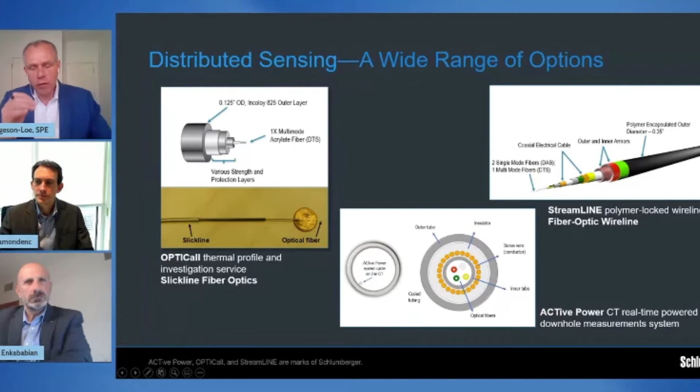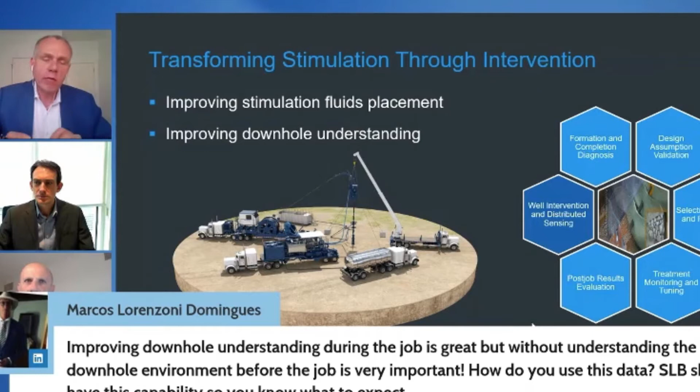Thanks, Pierre. So you talked there about the technologies, and in particular how fiber optics have been a big step change in this technology revolution in helping us improve effectiveness of the operations. So I'm just going to pick up a question from Marcos Domingues from the audience. Improving downhole understanding during the job is great, but understanding the downhole environment before the job is very important. So question to the pair of you is, how do you put all this new technology in use for a better understanding of downhole conditions?

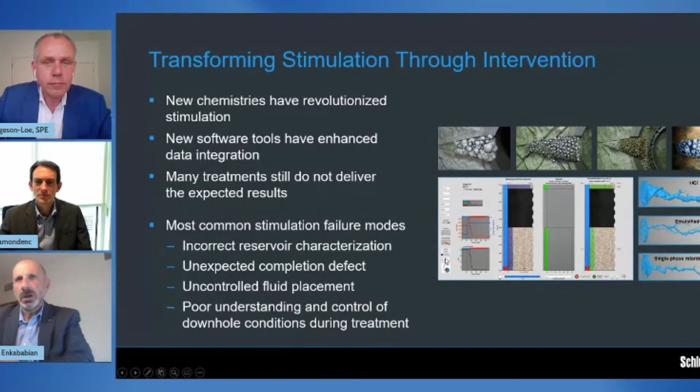So, excellent. Philippe, I let you take a stab at it, and then I will pitch in. Well, I think that ties to the section on formation and completion diagnosis. If you go to that section, and maybe we can go to that one. Yeah. So clearly that's an extremely good point. Understanding what's happening during the operation is important, but understanding what's happening before the operation is also very important.

Why? Because what we're going to see before the operation is going to potentially help us redesign the operation and prevent some of the failures that would have resulted had we not understood the environment before the treatment. And then I'll just mention a few examples, and Pierre will add to my point and show you how that technology is utilized.

But things like an unexpected thief zone is something that we have found more often than we expected when we started to do some actual measurements of injectivity using mostly temperature data. And as we know, a thief zone can have a drastic effect on the stimulation itself, because it will take most of the fluid. The tighter formation will not be stimulated, so you may get some good result when you open the well, but then it's going to collapse rapidly in terms of productivity.

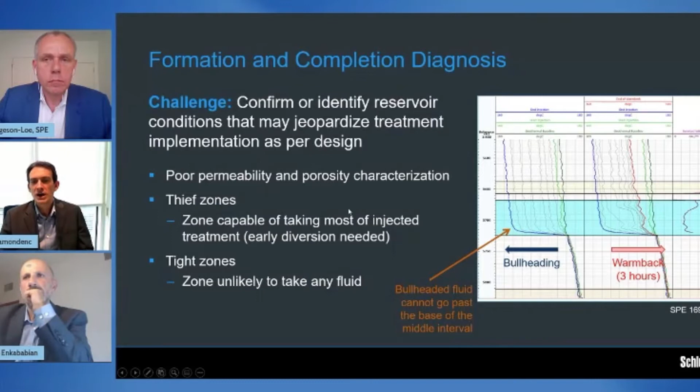We obviously have an analysis of different zones, but we could look at, for instance, the presence of faults and the presence of natural fractures. Philippe can be a good witness of this. In the stimulation world, you are always afraid of undetected big things, and natural fractures, which tend to be difficult to detect and characterize, are one of the big unknowns that you would have during a design phase, and after that for the execution of a treatment.

Now, having all the different tools totally agnostic of which conveyance means you're using allows you to have that characterization that is going to make the difference between performing an operation that may be okay in terms of the delivery and one that is really going to make a difference.

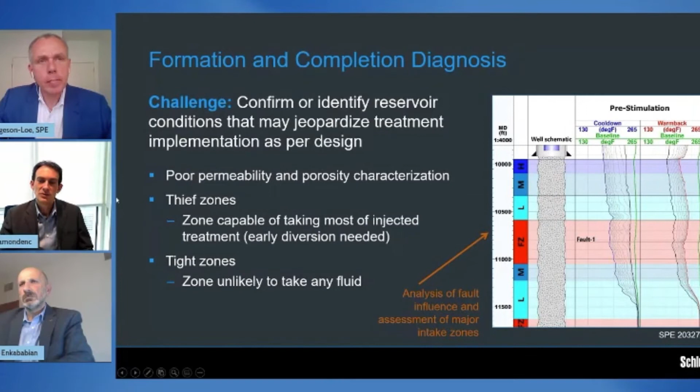And because we're talking about conditions that have a high degree of uncertainty, especially in the design phase, look at, for instance, the completion that Philippe was talking about. One of the aspects of the completion, whether this is the presence of maybe a casing leak, maybe a failure of one part of the completion, sleeves that wouldn't be holding, or in this particular case on the screen, swell packers that wouldn't be holding and segregating between the different zones. Those are the type of things that today we can analyze, and they are going to make or break an operation if we're capable of detecting them.

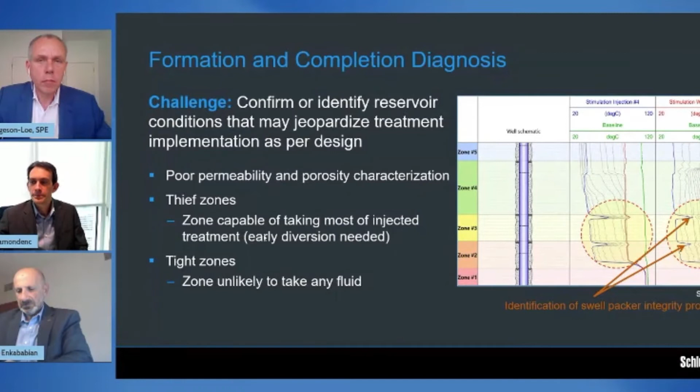Thanks, Pierre. So we're picking up some great comments from the audience here. The pair of you have been talking now about the importance of data. So let me just bring in two questions from the audience. First of all, Ahmed Tunublu: how do you design and execute the jobs if some or most of the reservoir data is missing?

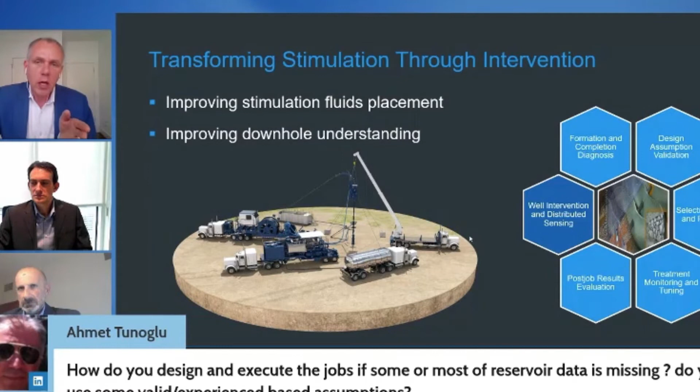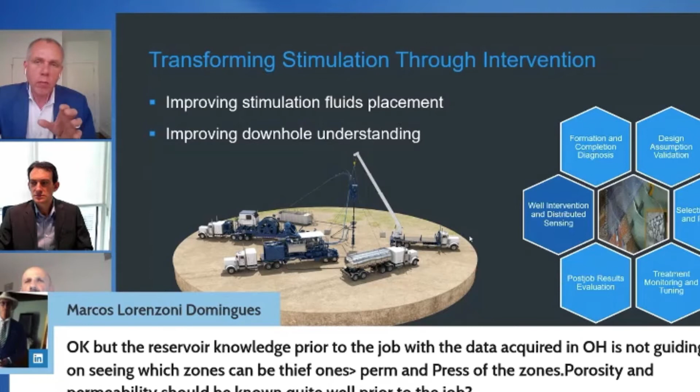And another aspect of data, Marcos Domingues, thank you again. He's asking, a lot of the reservoir knowledge prior to the job is acquired in open hole. So how does that maybe conflict with what you're going to be doing in the stimulation operation itself? So the question here is, how does access to data enhance operational efficiency and help you improve the stimulation outcome? And when it's missing, what do you do? Okay. All right.

So I like these two questions because in one case we don't have the data, in the other we have the data, and to go back to this formation diagnosis, if you don't have the data, the ability to go downhole, do an injection test, look at the injection profile, and derive the injectivity per zone allows you to create a data set that you can use to see if your design is adapted to that data set.

If you find out a very homogeneous reservoir, then a certain level of diversion will be needed. If you have a thief zone, you can go more aggressive. Now, if you have the data and out of that data, you derive a permeability profile and you know which are the zones that are going to take more fluid than others, and you design your treatment, you still want to go down there, do an injectivity test, and confirm that your assumptions are correct.

Because if they are correct, I mean, you've wasted half an hour and a little bit of water. If they are incorrect, then you really want to step back and look at your design. So in both cases, the ability to test before you do the job is important, and it's also important to validate your design assumption, which you derive from the data you have. And I'll just take two examples, and then I'll let Pierre continue on that.

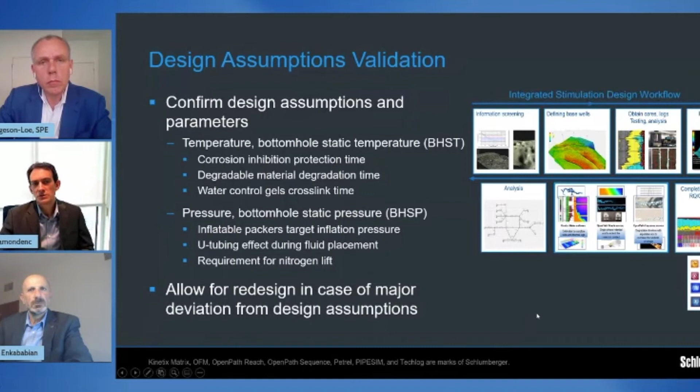So it's not only from the standpoint of getting the information right before performing the job because you have the equipment or during the operation, but over time you have that historian being built up and that information through interventions that sometimes have nothing to do with stimulation, but are going to give you that edge to perform better on the stimulation.

Now, just to give a few examples, this is one of those cases where a field was requiring some abandonment and trying to have a rejuvenation. The big question was, okay, but how do I do that at the level of a campaign? How do I get that data to truly know where I need to abandon the interval? Do I have bypassed hydrocarbon? And this was done through a development of being able to log with typical logging tools, but on a piggyback of a well intervention, things that maybe 5-10 years ago wouldn't have been possible, but that was possible through an introduction of the technology.

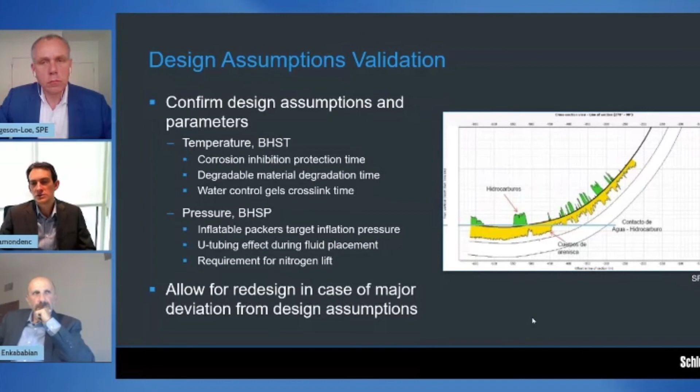Another great example to what Philippe was discussing is that especially for anything that has to do with conformance, so water shutoff or gas shutoff, very often those fluids are designed so that they start setting within a specific range of pressure and more than that temperature. Now, obviously, knowing the exact temperature in front of the interval where you want that activation to happen needs to be very accurate and is extremely hard to get, even though you have a record of operations maybe a week before. And that's where having access to the downhole information of pressure, temperature during an intervention and while you're pumping in the well is changing entirely the approach.

And especially for those polymer foam systems, such as one example we have here on the screen, it meant bringing a success ratio of about 50% to something that was close to 95%, by just getting access to that type of log, which tells you as you're pumping in the well how the temperature at the bottom is evolving, so that on the fly you can choose which curve and which amount of additive to put. So those are great examples of something that may seem simple in terms of data access, but which makes a big difference. And once again, it's enabled by intervention means.

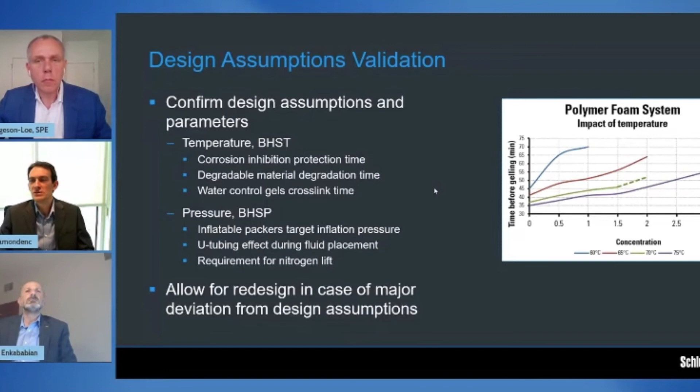Thank you, Pierre. So a lot of great comments there. You talked there about the importance of historic data, and because we're dealing with a dynamic reservoir condition, a lot of people assume it's static, and that we are interacting with the reservoir throughout various operations. So the criticality of data is always present.

So I'm thinking now sort of key takeaways for the audience: are the improvements that you've been talking about for stimulation through intervention really focused around the execution of separate treatments, or can we learn a lot from accumulation of data and knowledge and experience? Okay. All right. So I'll make a first attempt.

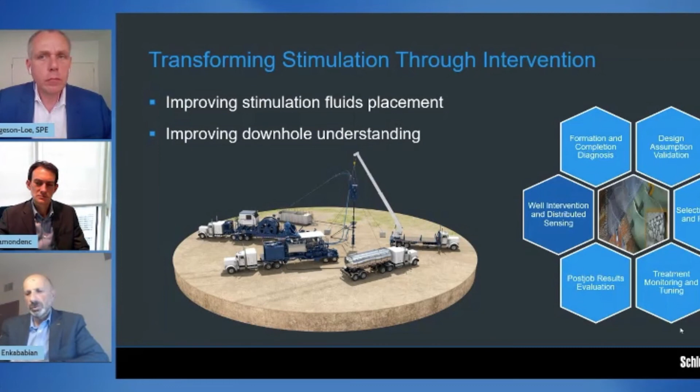The importance of data is not only limited to the treatment that we're using the measurement on, whether it's in assessing the efficiency of diversion, or looking at the kind of volumes and skins associated with these acid volumes in different types of formation by doing a post-job measurement. These are all data that can be used to refine the designs and completely change the stimulation strategy for the future wells.

So the value of the data is not only in the well we apply it to, but in the future wells. And Pierre mentioned the value of temperature measurement for water control a few minutes ago. So that is really one of the key takeaways. The data is not valuable just on the well you apply it, but on all the wells that you're going to do in the future.

To complement what Philippe is saying, you obviously need to take into account the different time horizons of the use of that data, how you're using that data in the short time frame and in the longer time frame.

Having, for instance, a comparison between pre-stimulation and post-stimulation was the old approach, extremely valuable in terms of learning what worked well, was that a good improvement, and a way to quantify the success of that particular approach. Today, with the introduction of all those measurements we have during the operation, we can contextualize this, and we can actually make the link between what's happening during the operation and the outcome, and we can reach that level of quantification of the success, no matter which way you want to look at it.

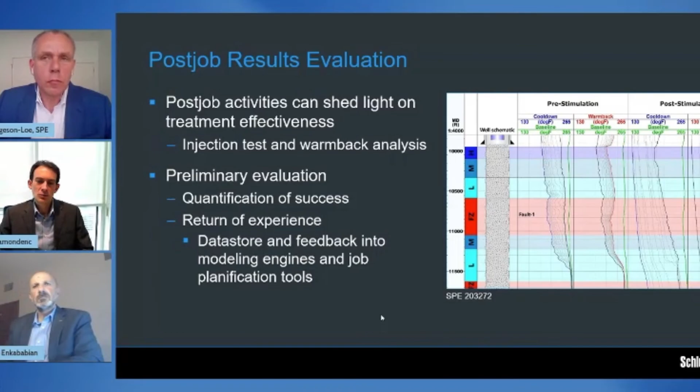And as I said, when you put that back within the context of the history of interventions in one well or on one field, and you take all that data in, all of a sudden you realize that you can customize a stimulation strategy nearly on a well basis or on a field basis, which is certainly the difference compared to the old rule of thumb approach, which was categorizing big chunks or big problems. Now it can be truly customized to the level that today you can define some very neat workflows that are fully leveraging the full scope of what you would have in the wellbore, especially with intervention means.

I said at the beginning that stimulation today is not just pumping a fluid from surface anymore. What's changed in getting access to the data and being able to look at it from a higher standpoint between wells, making that relationship between what happens and the outcome, is that we started devising much more complicated workflows, where a stimulation operation would involve some perforating, some isolation, some pumping of different types of chemicals, all in one single run or one single operation.

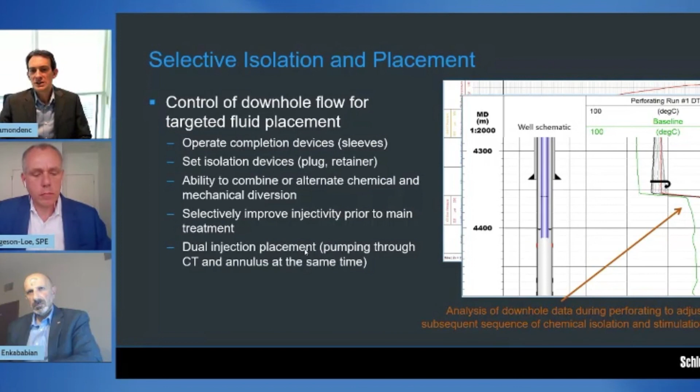So I think this is really the main takeaway: you have access to the data, but today we are beyond this. We are using the data in real time, but also outside of that real-time small loop, in the continuous improvement of the methodology and the workflow for the stimulation. And this is really what is delivering outperformance on the stimulation, whether you're looking at hydraulic fracturing, matrix stimulation, or conformance, and considering that we have more and more mature fields. You can feel the importance of all this, because it's going to be a big part of our future.

Pierre, thank you. That was an excellent summary of the opportunity now available to everybody to not only acquire this data in real time through intervention operations to improve stimulation design, but also to accumulate the data historically to continue building an experience base and a knowledge base. So thank you very much.